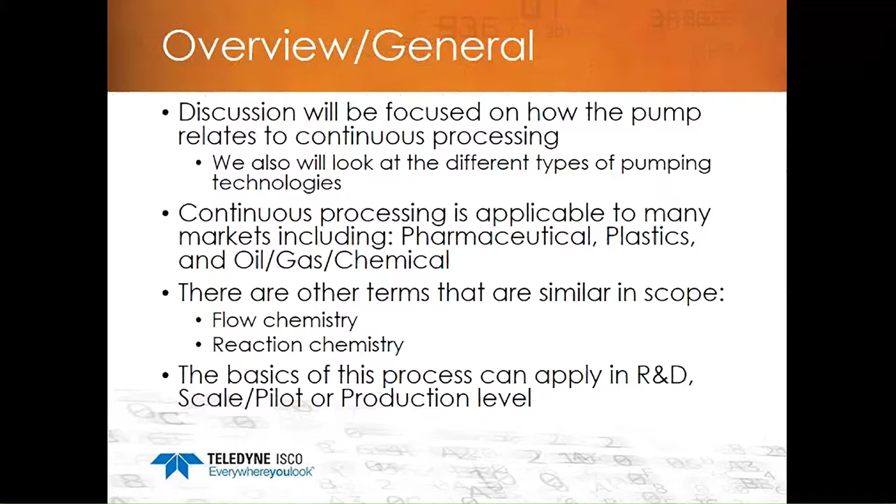So let's just get this on the table - what is continuous process? When we talk about manufacturing, because what we're doing is creating drugs, creating new ways to use oil, creating products out of the things we're talking about, it's a method used by manufacturing that puts out the greatest quantity of product over the least amount of time. In all reality, its converse application is batch processing, where you take a bunch of materials, make a group of one type of product, stop it, reboot, recalibrate, and start another one.

A continuous processing plant is basically designed for a seamless flow of the product - going from one machine to another station to another station. It's all just one always-working manufacturing process.

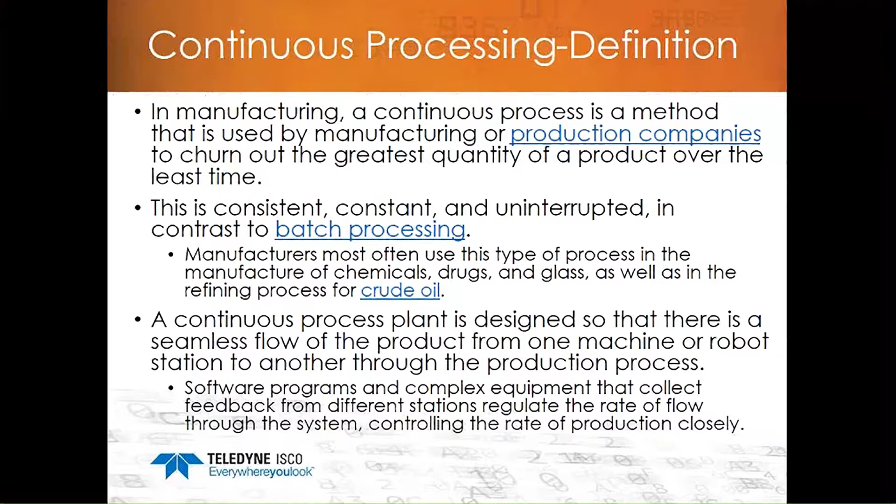Conversely, when we look at flow chemistry - again a term that's used here - the chemical reaction is run continuously rather than batch production like we just talked about. Flow chemistry is becoming much more appropriate and applicable in the pharmaceutical markets, and you're hearing more about it in plastics and obviously oil and gas. You'll see a lot of it in relation to laboratory settings, but for the most part, it does move out to production level.

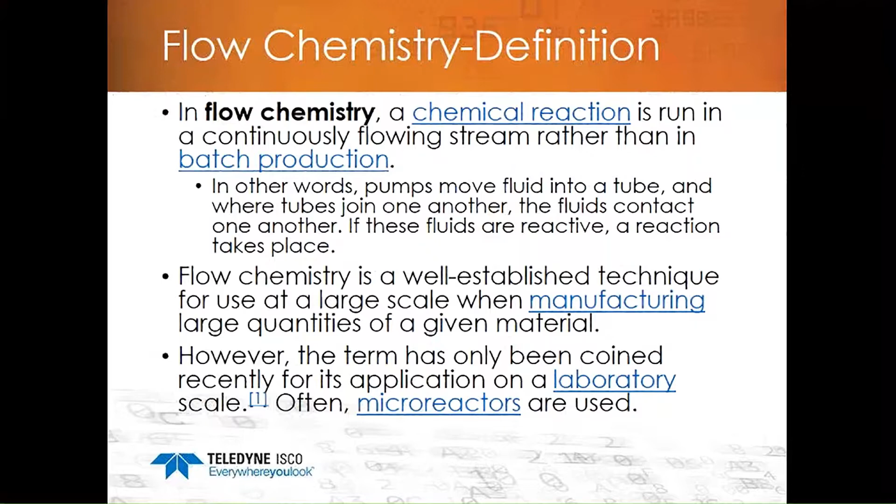So in one simple slide, these are the differences between batch processing and flow chemistry or continuous process. When you're looking at a batch, you've got two chemicals, two products, two reagents - whatever you're using in your facility - being put into a holding device, whether it be a mixing tank, a reactor, etc. The reaction, the new product, the third product, is being created within that batch. It's classic - it's the way things have been done for years and still continues to be done today.

I'm not going to come out and say flow chemistry is new, a fresh new idea. It's been around for a long time, but it's becoming more appropriate and applicable because of its ability to create things at a more lean process. With batch processing, some of the key factors you've got to worry about are concentration - getting the right mixing, keeping the temperature consistent, et cetera.

When you look at flow chemistry, in the upper right of the slide, the idea here is two chemicals or reagents are meeting in what can be considered either a reactor or some type of vessel or tube, and out comes a third or fourth type of chemical.

One thing to keep in mind is these pictures show two reagents coming in at a time, but this can be up to 10, 15, or more different reagents at different flow rates and methods. We'll talk more about that as we go. Outside on the other side of the reactor or vessel will be the product you're trying to create.

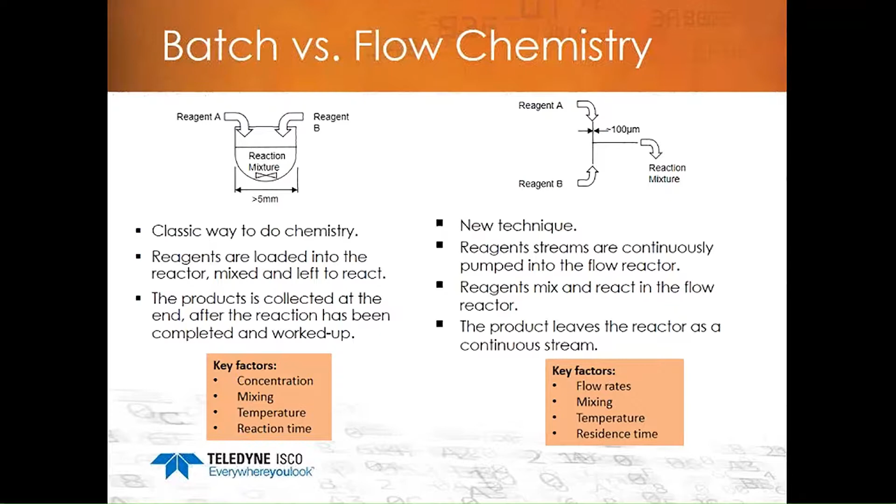There are some advantages and disadvantages of continuous processing, continuous manufacturing of materials. The advantages are very clear when it comes to uniform product.

Anytime you have a batch process, and you make, say, chemical A in the batch process, you make 500 grams of it, then stop, recalibrate, make something else, and then go back and make that original chemical again in another 500 gram batch, there might not be consistency between the two batches. As much as we try, that's very difficult in a batch process.

In continuous processing or continuous flow chemistry, you have the same dosage, the same amount of material coming in, whether reagent A or reagent B, at the same rates you prescribe all the time. It allows you to make longer production runs and create larger volumes of product.

All you have to worry about is continuously feeding the reagents, however many you have, making sure the material doesn't run out. At the end of the process, you'll have a continuous stream of the new product you're trying to create. It's easier to design and optimize.

You're just figuring out how to get the different chemicals together and through the reactive process, and then you collect the third chemical at the end.

Obviously, more uptime, you're more productive. You're producing more product because you don't have to take the time to shut it down, restart, and clean materials. You do that over time, but with a batch process, once you're done making that batch, you have to restart again. This is like flipping a switch, off it goes, and just checking on it here and there.

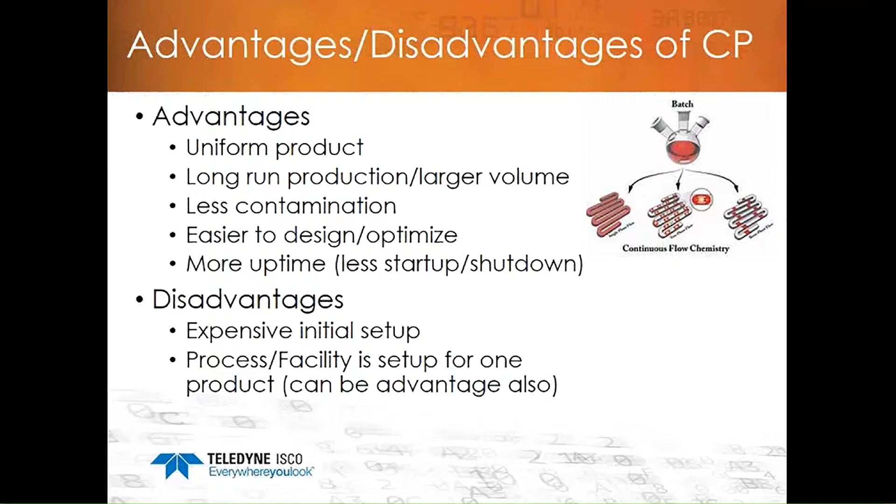Just to show some pictures of the basic idea - many of you already understand this, but I wanted to show what it looks like. On the left here, you see two reagents coming in, going through a temperature-controlled reactor, and a third product coming out. That's very basically what continuous processing is when it comes to manufacturing or chemical reactors.

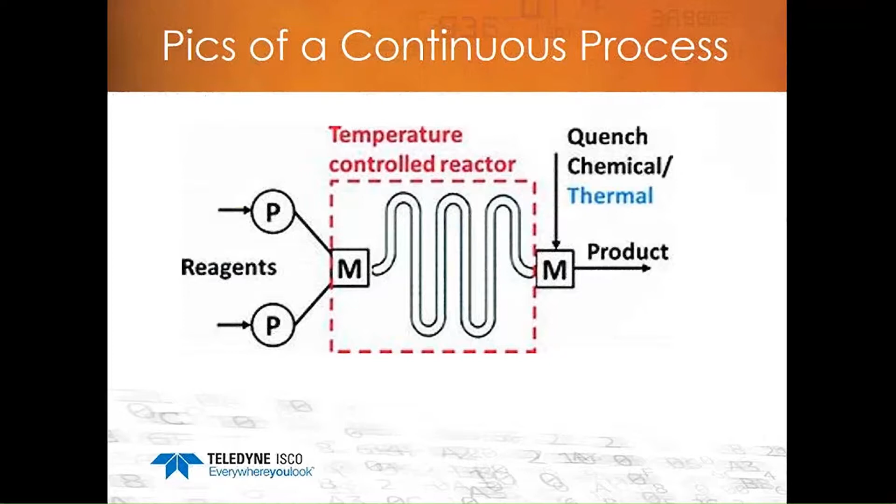Some other pictures here, very simplistic, but you can see how the diagram rolls out the idea of what continuous process is. The picture down below shows a couple of pumps doing it, and this gets into the crux of our presentation.

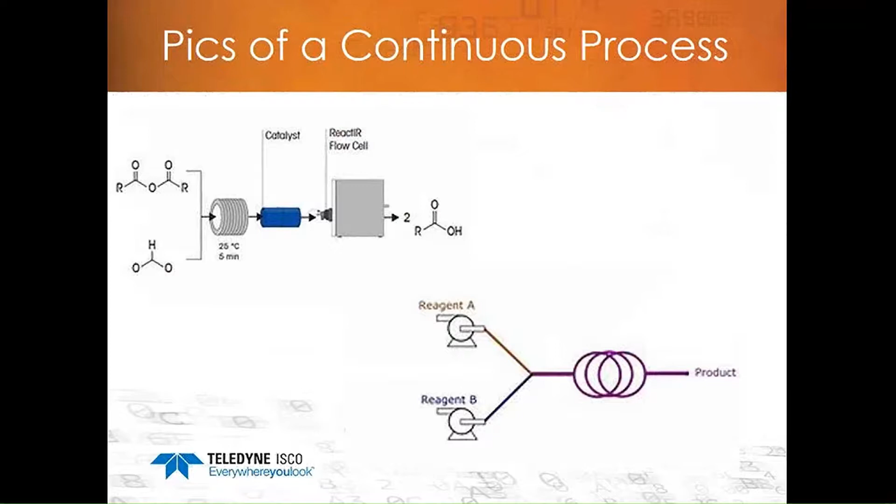Given the pictures I showed previously, especially the one in the lower right, you can see that pumps are very important, if not the most important part of the continuous processing system. Arguments can be made for the materials themselves, and arguments can be made for the reactors because the reaction doesn't occur without that - fully understand that. But from the core of what you're trying to do, you're moving two or three chemicals through a process to create a third or fourth or whatever.

You can't do that without some type of mechanism to move the product. The pump is what moves the product through there.

When you're designing your continuous process, you want to make sure you consider some very key things, and this is going to be very appropriate through any types of industries you're working. You need accurate flow rates, especially at low flow rates, because in some chemical reactions just a minute change can have a whole change in how the process works. And your pumps, you'd like them to have a wider flow rate range, so you can use them for more than just one process, and they become more flexible over time.

Chemical compatibility is very, very important. If the chemical you're using or moving through the fluid path can in any way react with the metal or the material in the fluid path, you're going to degrade the integrity of the chemical or the product. You're also going to degrade the viability and life of the pump over time. And in the third case, it could be completely disastrous and you have leaks, et cetera. So you really need to be very aware of chemical compatibility with the metals in the fluid path.

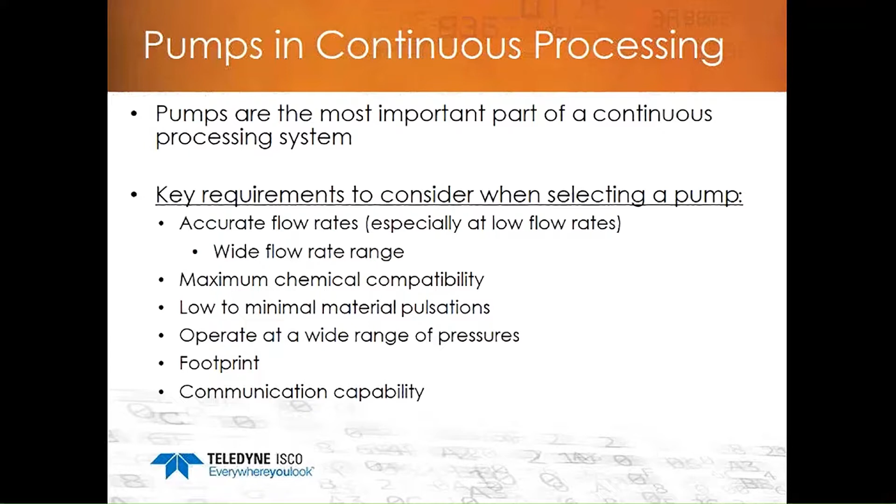So let's look at flow rate. Flow rate is a very key component of the success of a continuous process system. It can vary with each reagent.

Many times you'll have an application designed with a flow rate of 5 milliliters a minute for one reagent. The next reagent, B, might be 0.05 milliliters a minute because it only needs that much dripping in. And then you could have a third reagent at 25 milliliters a minute. So you have different flow rates going into the reactor or vessel you're using that can actually affect the composition of the end material, the end product.

You need to be very aware of the ability of the pump or pumps you're using to manage this flow rate and to be very accurate. Accuracy is very key because, as we just stated, a drop or a couple of drops more of a certain material can really change the overall end result. So accuracy is very, very important.

You can regulate the flow rate into the process with a valve. You can manually close a valve to stop a certain reagent going in, then open it, or have it electronically done. There are ways to manage that. You have to consider how it works with the pumps installed on your process.

As I stated before, proper, accurate flow rate can definitely affect material integrity. If you're dissipating color or flavor in food and beverage, or color into plastic, these are things you have to be very, very concerned about.

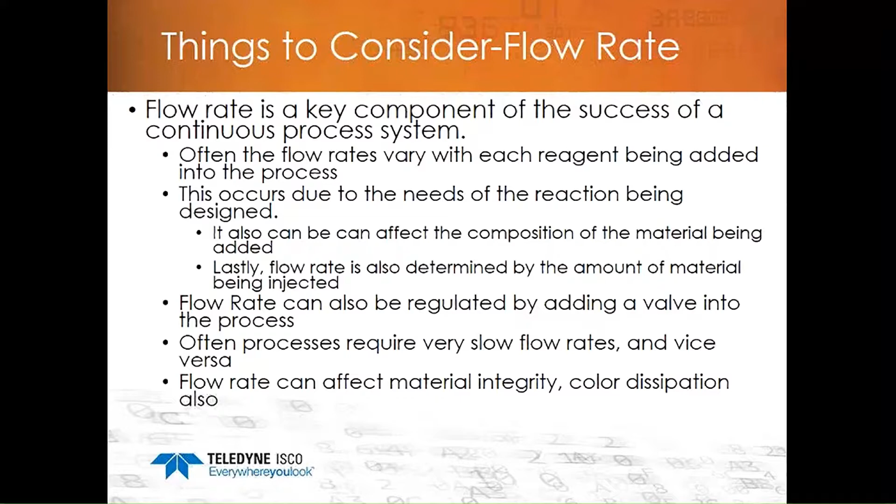Another key point to look at is pulsation. Pulsation in flow rate, in specific applications for flow chemistry, can be very damaging to the process. Many times we get asked to have as little pulsing as possible. There are certain pumping technologies out there that are more appropriate for that than others.

Some of the pumping technologies out there, and we'll talk about those in a bit, if you add a pulse dampener, either built into the pump as an option or added into the flow of the process, that can definitely alleviate things and help the pulsation. Pulsation might not be a problem for you, though. The chemical or material you're using isn't as reactive to a bump, a pulse, or a change in flow rate as others might be.

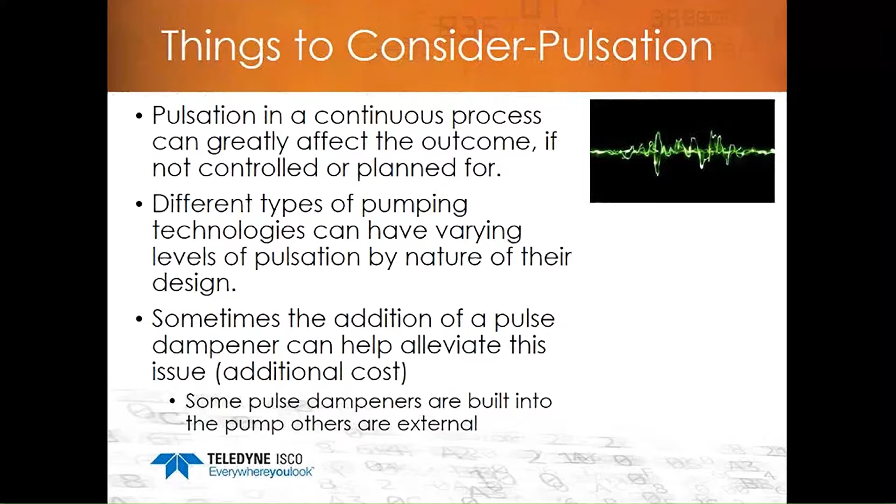So you have to look at that and determine how much pulsation you can have, and that'll help narrow down the type of pump you're looking for. Couple that with the ability to get down to a low flow rate or a high flow rate. These are the first two things you want to consider when looking at a pump. The third one, another big one I mentioned, is chemical compatibility. Life of the pump is definitely an issue.

Safety of the people working there is definitely an issue. If the material going through the fluid path reacts negatively to the actual material of the fluid path, you could have a significant issue on your hands. You need to make sure you consider all options as far as the type of material you're using and how it reacts with the different material paths that are out there.

Some examples you'll see in pumps or in the pump fluid paths: Hastelloy, PEEK, Teflon coated, stainless steel, titanium. There are other materials out there that are variants of these, different types of stainless steel, like nitronic 50, 316 stainless steel, etc. Make sure you work with the vendor, work with your supplier to really dial in on how the chemical you're using or even creating will react with these types of materials.

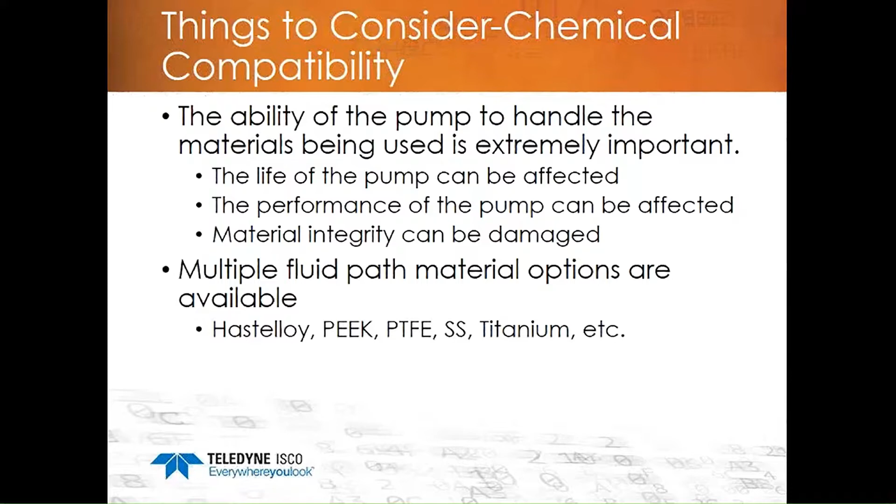Additional things to consider when you're setting this up: the footprint that the pump takes up. I've been in a bunch of labs over my time, and one common denominator is the space is very tight, especially under certain fume hoods, etc. You want to consider, can you accomplish the same result with a smaller footprinted pump, a different size pump, differently mounted? Many pumps out there, I know some of the pumps that ISCO has, can be mounted upside down, sideways. Use the space accordingly.

Does the pump have to be mobile? Will you be moving this process? Will you be running this process for four weeks and then shifting it and moving it somewhere else, or tearing it apart and using the pump differently? These are things you need to consider.

Is the pump scalable? As we talked about, this is used in process design, R&D, scale, and pilot. If you're using it in your R&D lab and you've got it to a point where this is exactly how we want to use this pump, how we want to use this process, can you use the same pump as you scale up? Can you use it in production? You have people to help you with that, but you need to consider it.

Single, dual heads, another consideration. And then what other equipment do you need, and what is the impact on project cost and ROI? We talked about reactors. How big of a reactor do you need? Do you need a small microreactor? Do you need a large reactor vessel? Do you need more valving, as we talked about, to adjust the flow rate? You want to look at that and see what part the pump can help alleviate, or where different types of pumps can help with the overall design.

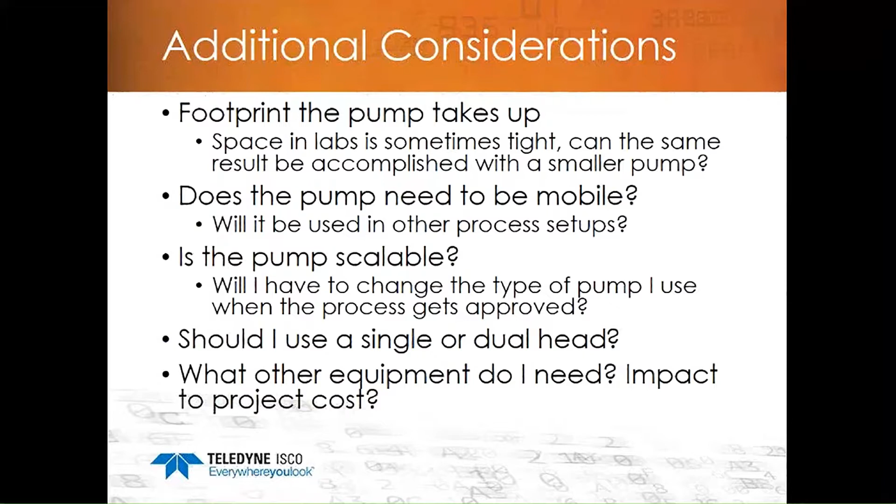As I talked about earlier, if you have a certain type of pump, you need to add a pulse dampener to reduce pulsation. Can you use a different pumping technology to minimize the pulsing and maybe save some cost over the life of the project? These are things you need to consider.

So let's talk a little bit about different types of pumps that are out there in the market today, or pumping technologies. We're not going to get too much into vendors, we're going to just get into the different technologies.

First off, there is syringe pump technology. And what I want to be clear is this is not the tabletop syringe you would see from Harvard, et cetera. This is more the syringe pumps like ISCO has, like the D series, or some other competitors out there have, a vertical or dual syringe pump. Long-lasting design, a syringe pump can go for a long time. You just have to make sure you maintain it, grease the gearing, and the pumps will work forever. They work a very long time, which helps the ROI.

Pulsation is extremely minimal when it comes to this type of technology, just about pulseless. So when we talked earlier about being concerned about pulsation through your process and having to spend money to add a dampener, et cetera, you can look at a syringe pump technology, and maybe the cost differential is going to be better or the same. Very precise flows, accuracy is very high with a syringe pump, and you can get to much higher pressure.

Disadvantages: not going to lie, the initial investment might be higher than you would have for other types of pumping technology, and for the most part, footprints are a little bit bigger, depending on the capabilities you need. If you don't need a lot of high pressure or a lot of fluid movement, you can get some smaller footprinted syringe pumps out there.

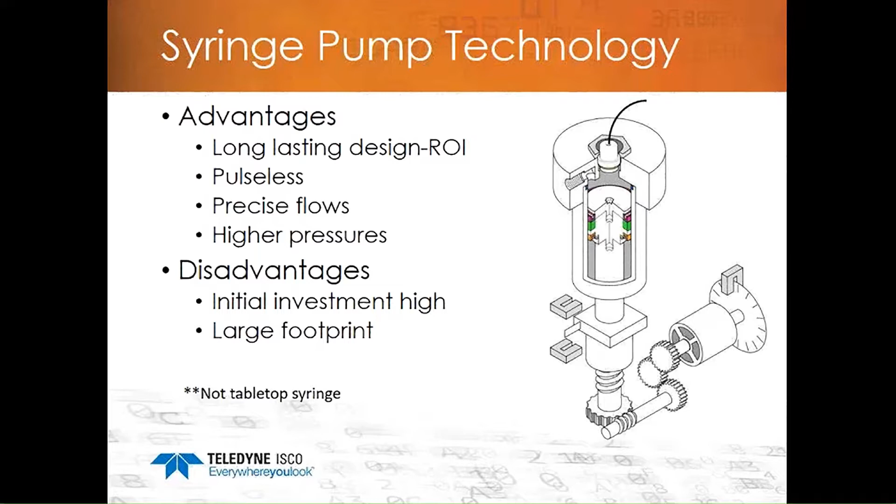But if you want the full capabilities and higher pressures, you're going to need the bigger ones. And then, obviously, we can help with that. So this is one technology.

Viscous fluids can be difficult. So if you're using something very gummy or paste-like, and if one of your reagents is thicker or more viscous, maybe for that reagent you'll have to use a syringe pump, and for the others you can use a reciprocating pump or another technology.

There are check valves involved. Sometimes with the materials you're using, you have to consider that, because there could be gumming, which could cause performance issues down the road. Look at the materials and the type of pump you want to use.

It's not a pulseless flow, but you can add pulse dampeners, or buy one separately and include them in the process—that will minimize the pulsation. If pulsation is your number one issue for this particular reagent, I would say maybe take a look at syringe pump technology, and then as a next step down, look at a reciprocating pump with a pulse dampener.

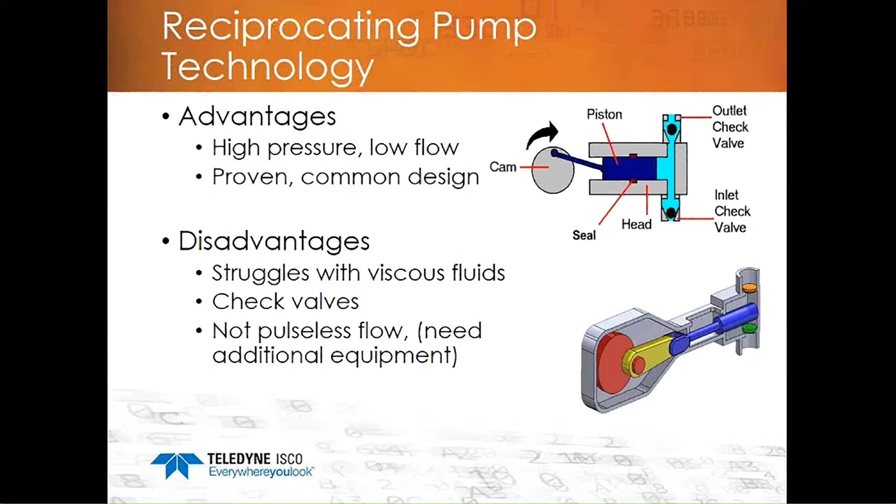Peristaltic technology is another one. This is a very simple concept: it's a roller that's pushing something out through a tube. There's no wetted part—the only wetted part is the hose.

If you're dealing with drugs or medical materials, you have to consider FDA concerns, if the chemical, medicine, or material you're pumping will ultimately end up going into the human body. Those are things you have to consider.

I do know that maintenance on these is really easy. Many of the new peristaltic pump technologies out there—you change the front head, take the head off, put a new head on, you're done. It's like 5 minutes, you've got a new hose.

Where the expensive part comes in is your wear life. Depending on the different chemicals you're pushing through the hose, you can degrade the life of the hose and cause wear faster, so your ROI may change because you're having to replace the hoses more often. Along with the cost—some of the hoses out there could be hundreds versus $1,000 per foot for 2 feet. Those are things you need to consider and look at in your ROI as you're using it.

Footprint on these is pretty tiny. They're pretty small, so they will fit into fume hoods or in your labs pretty easily. So that's definitely an advantage.

It is not pulseless. Pulsation—you cannot add a pulse dampener here. The pulsation is going to be very steady; you're going to see it when you measure out the flow. If that's okay, then this could be a good technology for you for one of your reagents.

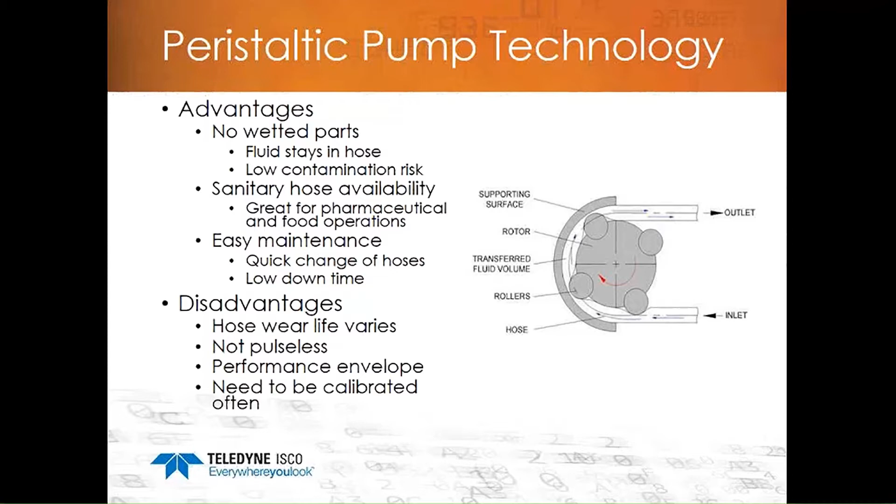But again, in a continuous processing or flow chemistry application, you can use different types of pumps for different reagents. So you have to consider each chemical you're using and what you need it to do, or how it's going to need to react within the system.

A couple other technologies: gear pump technology. This is pulseless flow, it's just straight through. It's bidirectional too—I don't know that you would have a need to go two ways in some processes, but maybe you do. But if you have a gritty material or something with particulates in it, it will grind away the gears as it goes through.

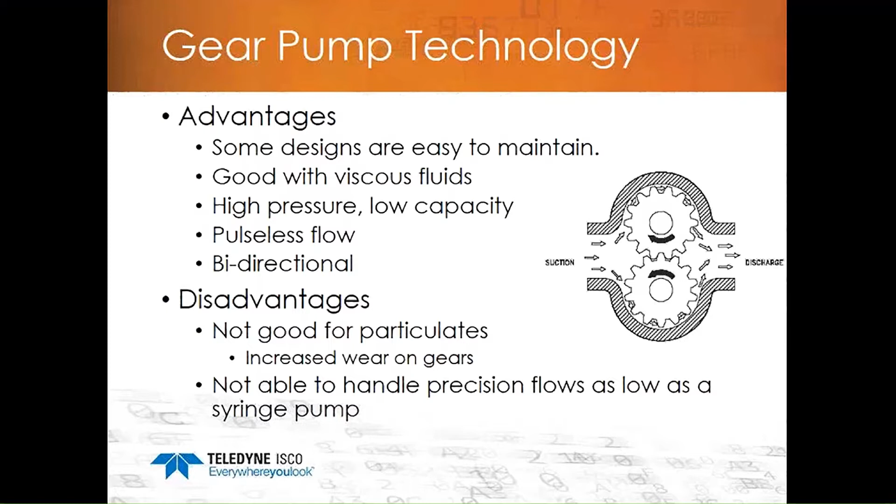So the life of the product will not last as long; it will take a lot longer, and it will take some time to change the gears too. There are a couple gear pumps out there that you can change within a couple minutes, which work very well. But from the standpoint of continuous processing or flow chemistry, I think this is a technology that might be more used on the full production side, once you have mixtures all set up.

Diaphragm pump technology. This is a simple technology that's out there, very similar to piston, the reciprocating pump, like a train engine, pulling the piston back, sucking the diaphragm out, pushing the diaphragm back in.

There's little maintenance to it. The diaphragms pretty much go forever, but you do have to consider that particulates do wear away some of the coating or the edges of the diaphragm.

Check valves, check valves, check valves. We all know that they can be a bane to our existence sometimes when they get fouled up or messed up. Most diaphragm pumps out there have check valves, and you'll have to get into priming here, so that's not usually an issue with some of the other pumping technologies, but it can be tricky.

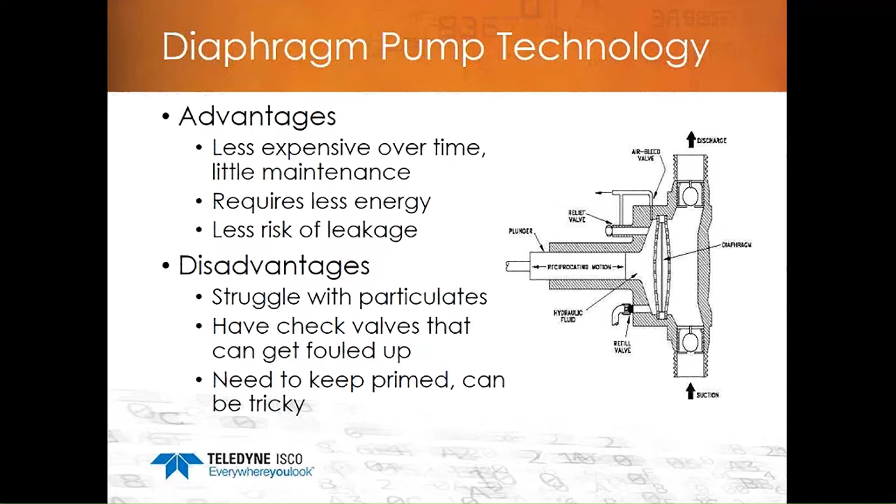I will say, looking at all the technologies we just talked about - syringe, reciprocating, peristaltic, and gear - for the most part you're going to see syringe, reciprocating, and peristaltic in lab environments and even in scale-up, especially with multiple reagents being added to the process. You don't see gear so much. You'll see diaphragm occasionally, but the top three are usually syringe, reciprocating, and peristaltic. So when laying out or designing your continuous processing system or project, consider those options.

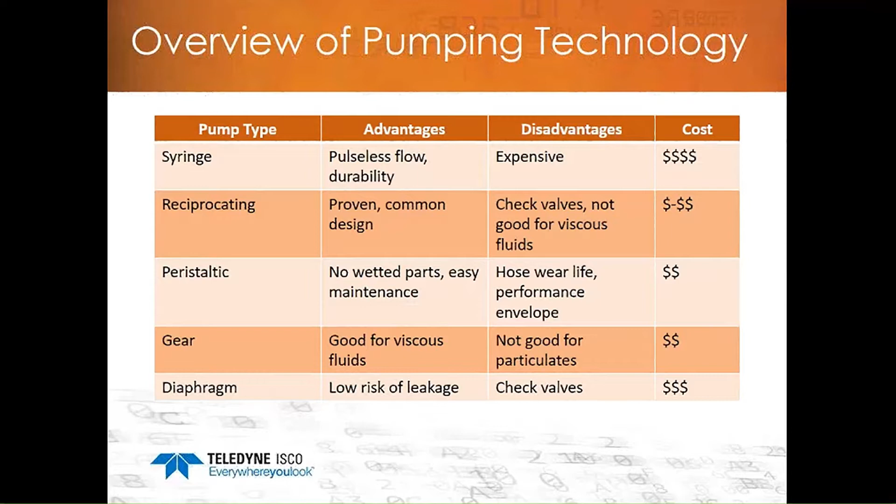Looking at batch processing, it's still out there, it's not going away - we're not saying it's a bad thing, we're just trying to show the difference between the two. Flow rate is very solid for our syringe pump, and pulsation reacts very well for reciprocating pump.

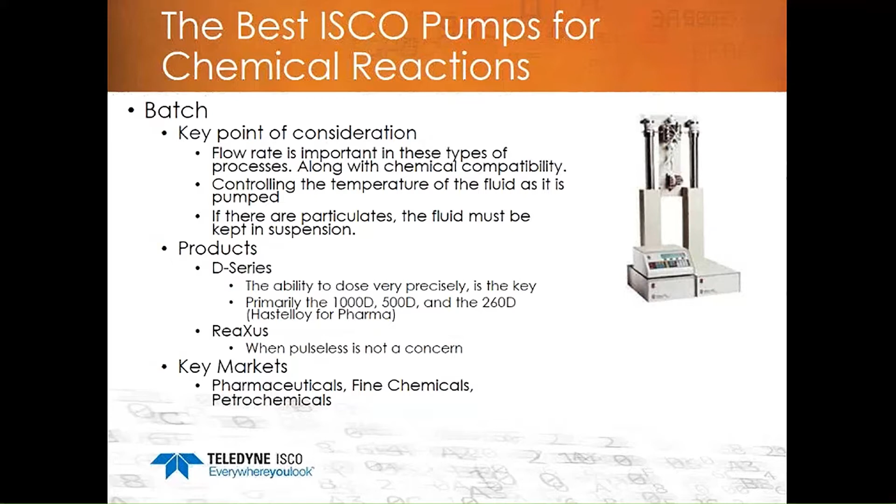For flow chemistry or continuous processing, we also have our pumps here, the D series and ReaXus, which are very good for these specific reasons: precision is key, accuracy is very strong, and chemical compatibility across the way is very strong.

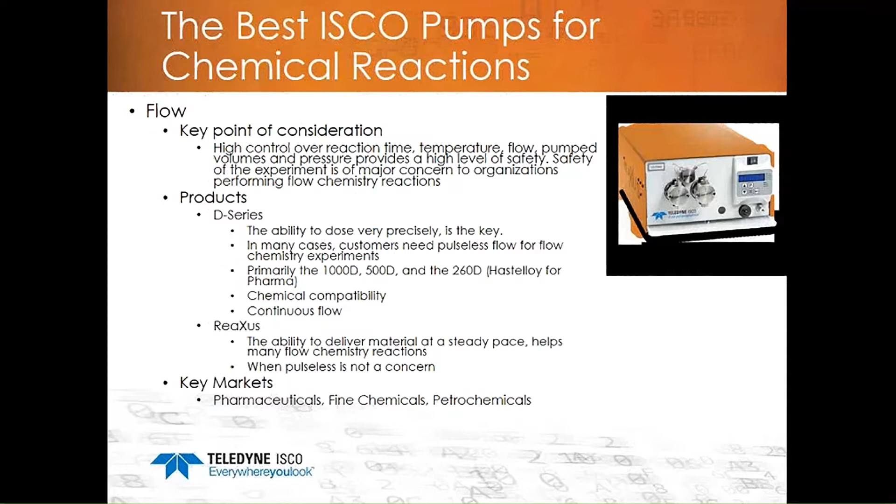So let's look at some of the things you want to consider as you're designing the pump into your process. I've got a couple slides here, and we'll address some of them as we go along. Okay, what type of pump?

First and foremost, you have to consider: are you going to design a batch process, or are you going to design a continuous process flow chemistry type system? As you're starting, I'm sure you know that already.

Again, you're looking at where you're going to design or set this process up. Do you have the room? What's going to take up some of the space - the reactor, the controller, the pump, the basins with the material in it? You have to lay that all out on paper and decide how much of that space you really want to dedicate to the pump.

Again, there's pump sizes out there that differ in performance and ability. You have your smaller ones - you can get super, super tiny peristaltic pumps, about as big as a phone that sits on our table, like an iPhone.

So consider that. What is the flow rate and pressure needed? These are some things you should know. This is like motherhood and apple pie - you know this stuff, but I want to walk us through it.

Number one here is viscosity of the fluid you're looking at, because as I talked about the different pumping technologies, viscosity and/or particulates in the material will dictate the type of pump you need and how well the pump handles it.

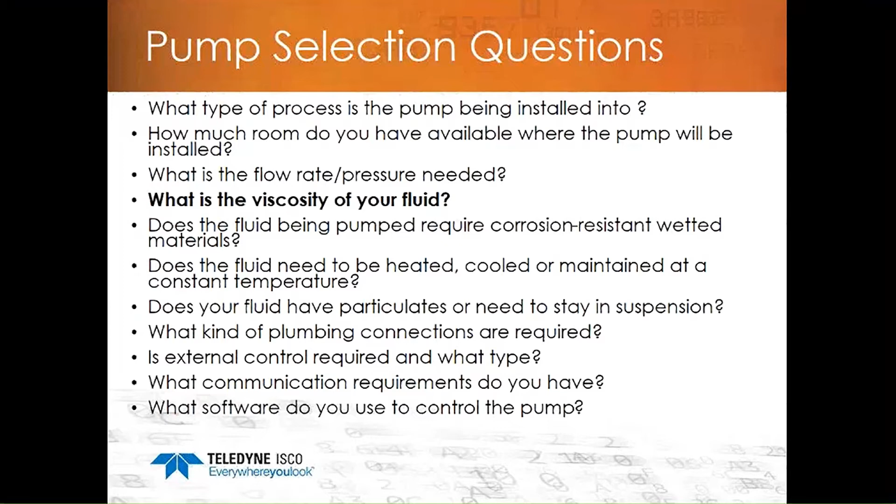More questions: how long is the runtime of the pump? You need your pumps to run 24 hours - that's something some pumps can't do. There are certain pumps in the market that just can't run for 24 hours, or if they do, it actually degrades how long they're actively effective.

Consider it from the standpoint of movement of the diaphragm. If your diaphragm is guaranteed for 10,000 pumps and you're running it for 24 hours, you're going to burn up 5,000 of those pumps in about a month's time - you're cutting the life of your product down, or cutting the life of your diaphragm down. So that's something you need to consider, and again that'll narrow down the type of pump you want to use, the technology or the size, etc.

Do you need to mount the pump? Again, you look at the space of a hood or the space of a lab, and there's always vertical space - you can put something on a shelf, hang it upside down, or hang it from the side of a wall. Can the pump still work in that orientation? If it does, then that's the kind of pump you need to look at, the technology and the class of pump.

What other equipment? We talked about reactors, pulse dampeners, valves, basins, potential vessels off to the side. You want to build that all in - okay, you have X dollars to spend. How much am I spending on a pump? How much am I spending on the other stuff?

And then, will the process be scaled up or used for production? Again we go back to functionality - can the pump technology actually do that? If you're using a peristaltic pump to run and test your process in discovery and R&D, can you translate it to a larger scale and in pilot? Do you have to change the pumping technology you're using - go from peristaltic to syringe? What does that do to the process?

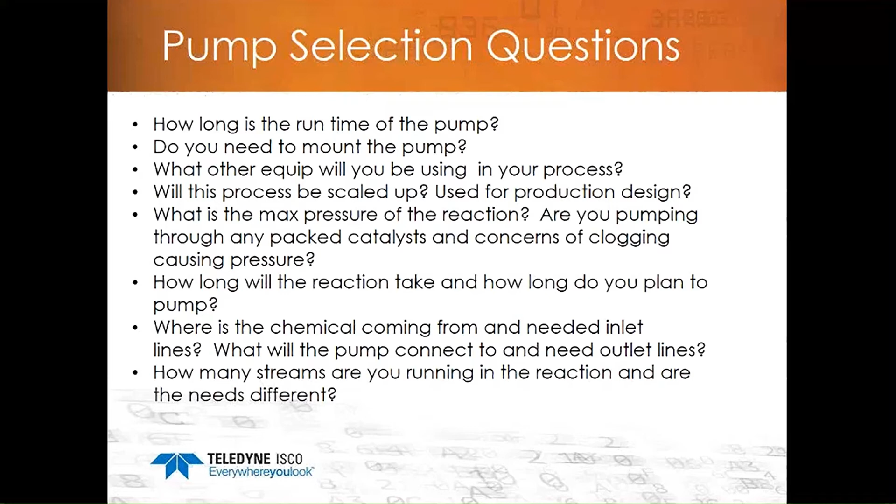We have pumps out there to do this. You can search on Google Scholar, and you can punch in Teledyne ISCO pumps or reciprocating pumps, flow chemistry reactions, and you will get all kinds of papers out there of people that have used these for applications and the types of pumps and what they've done with them and how successful they've been. That is definitely a good starting point for you.